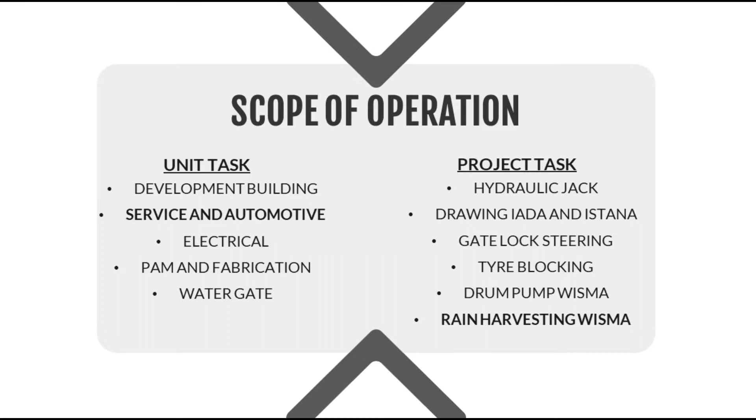As for the project task, we were given a project, each group, for us to complete. The project consists of hydraulic jack system, drawing, gate lock steering, tire blocking, drum pump Wisma, and rain harvesting Wisma. My project is the rain harvesting Wisma.

We go to unit tasks. For unit tasks, we went to site visit. My group and I went to visit the new drain location at Mukim Dewan, Machang. The visit is due to the complaint from the villagers about the irrigation system in this village.

The new drain function is to make sure the water in the river in the village can flow to the river easily.

During this site visit, I can see the roles that the JPS play in the community, and I can see the working system in a company where I can properly prepare myself for my future endeavors.

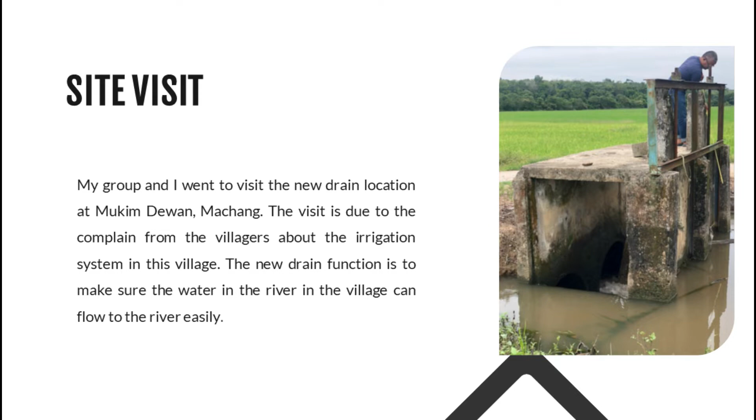We also have a workshop visit. In this picture is welding procedures. A welding practical slot has been booked several times by our supervisors for the intern students. The type of welding used is gas welding.

Gas welding is a type of liquid state welding process in which fuel gases burn to generate heat. This process can be done with or without help of filler material. We tried both methods, with and without using filler material, which is low fuming bronze, for practice.

During our project, I learned the most efficient way for us to perform the welding, because the supervisor in the workshop guided us on how to manage the gas welding components.

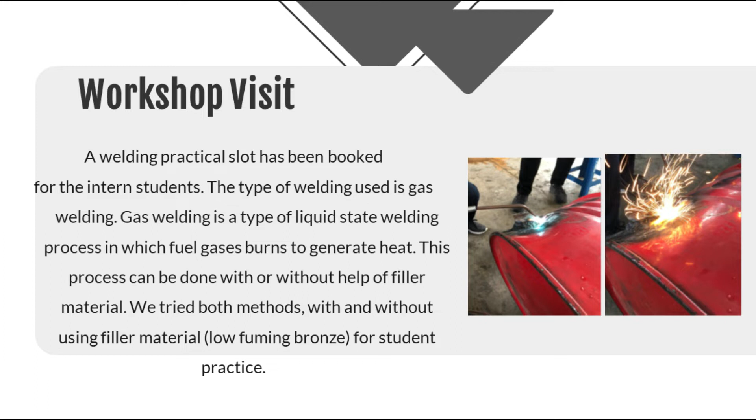Next, we go to project task, which is our group project. In our group project, we were tasked to conduct research on the rain harvesting system.

Rain harvesting system is a system in which rainwater is collected and kept in storage tanks rather than allowing it to run off. And in the JPS, there are 5 tanks that store the rainwater.

In this project, the rainwater is collected from the main building, where it is then redirected to 5 tanks to be stored and used later.

In this case, the water stored is used to circulate the water in the fish pond. The 3 tanks located at the back of the building and 2 tanks located near the parking lot next to it will be combined to be a source of water to the pond nearby.

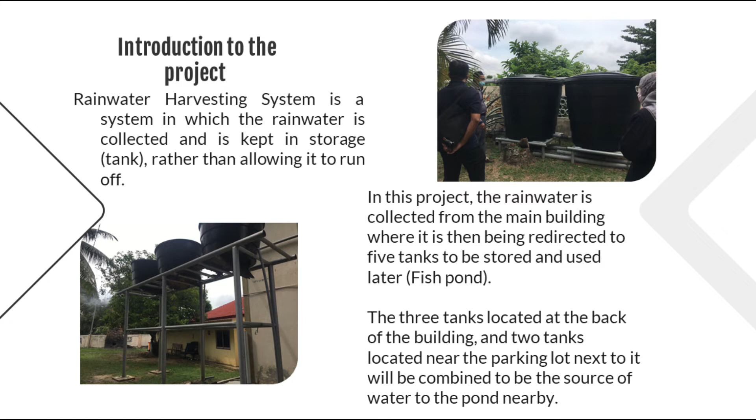The objective of our project is to harvest rainwater into the tank for filling the water into the fish pool. This way we can use a free energy system to supply water into the pool without having to rely on electric energy and external components such as a pump.

To cycle the water in the fish pool by using the rainwater harvesting method, to maximize the system by increasing the height of the 2 tanks at the front section. Next is also to save the budget from using tap water, since the water can be recycled from natural sources.

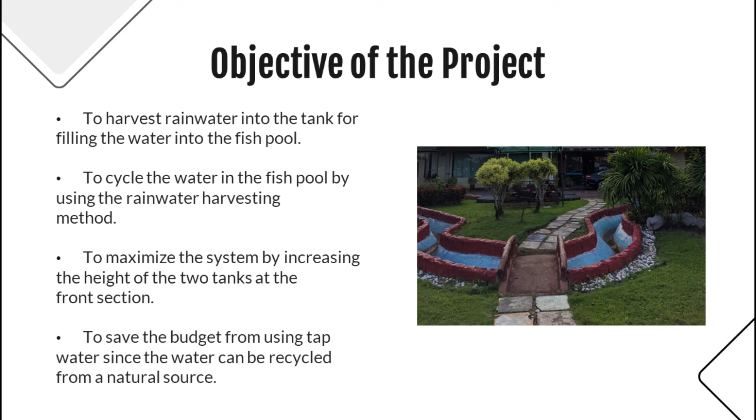We can see that the rainwater harvesting system is a really sustainable system in which we don't need to spend extra money and energy to supply water.

Next, we go to the flowchart of our project. During the starting of our internship, we were divided into groups. We were given the group projects, and next we received a detailed explanation by our supervisor, IR Tuan Haji Roslan Hussin.

Later our team members went to the Wisma JPS, which is located at Kota Bharu, to take measurements, to take the actual measurement of our project perimeter.

After that, we came out with a 2D design using SolidWorks software. And from the 2D design, we came out with a prototype, a mini model for our project.

After finishing our prototype, we came out with a DIY mini water pump. The water pump is to circulate the water in the fish pond.

After finishing the water pump, we went and tested our prototype. In the testing phase, there were several times when there was leakage from the model, and we had to repair it until there was no further leakage and it functioned well.

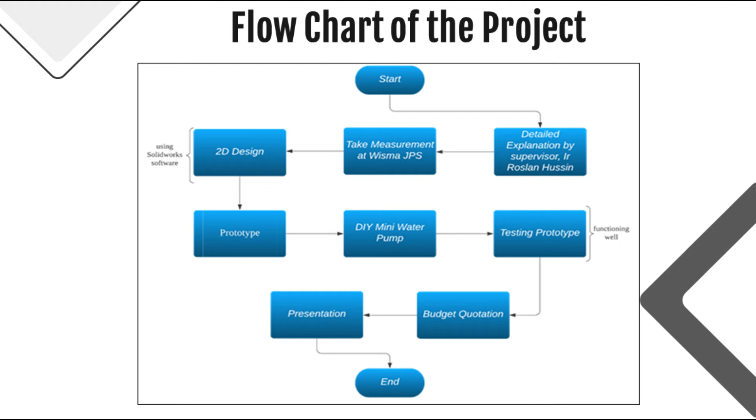Next, when we finished presenting our findings on the rain harvesting system, our supervisor gave us another task, which is to conduct a study on the booster system, also known as RAM pump.

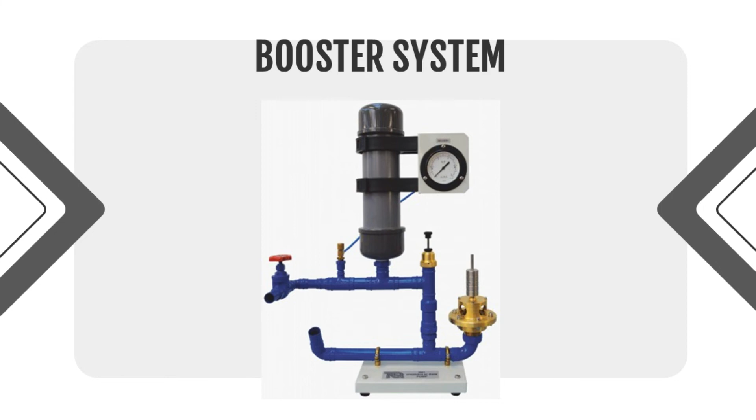Initially, the rain harvesting system in the Wisma JPS was already using the booster. However, the booster did not function well, and the water could not be supplied into the pool. Our supervisor asked us to find out why the booster system, a previous project done by previous internship students, didn't function well.

I'm going to explain briefly the booster system. Instead of using stages to increase the height of the tank to increase the force of gravity, the booster or ram pump is able to transfer water from tanks with lower heights to the fish pond.

Compared to our rain harvesting system just now, where we use the force of gravity by increasing the height of stages to make the water in the tank flow with high flow rate.

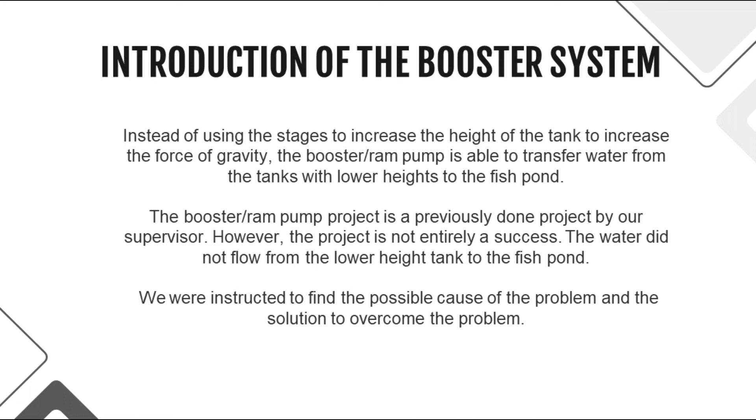The booster or ram pump project is a previously done project by our supervisor. However, the project was not entirely a success. The water did not flow from the lower height tank to the fish pond. We were instructed to find the possible cause of the problem and the solution to overcome it.

In the flowchart of our system, we started our research by receiving a detailed explanation from our supervisor, IR Tuan Haji Roslan Hussein. Later, we conducted a study on the booster system and listed out all the possible problems on why the ram pump or booster did not work properly. Then we proposed our solutions to the problems we listed.

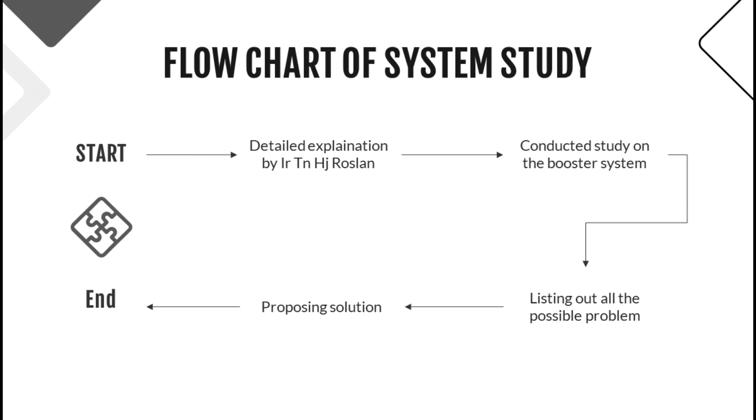That is the end of our booster project, which was basically only to study and assume why the booster did not work properly.

After detailed study, we came out with 4 possible problems. Number 1, the height of the tank is not enough to put pressure on the system, because we can see that the height of the tank is only 1 foot from the ground.

The second one is that there is a leakage somewhere in the system that causes instability of the water pressure. We assume that the leakage is underground, and it is hard for us to actually see it unless we dig the underground part.

The third possible problem is the position of the inlet and outlet pipe on the system, which are located at the same level, resulting in insufficient pressure to the water flow, so the water can't flow properly into the fish pond. The last one is that the system is not complete, due to the absence of a waste valve.

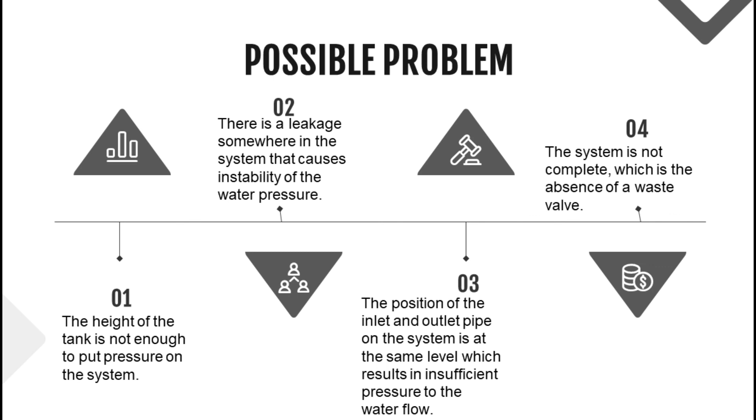So we go to our proposed solution. The first solution is to check the possible underground leaking of the booster by examining thoroughly. The second is to redesign or reconstruct the new booster with proper planning so that the system can work properly. The third is to increase the height of the current tank.

For your information, the current tank is only 1 foot from the ground, and we thought that maybe when we increase the staging, the pressure will be enough to make the water flow from the tank to the fish pond. So that is our group's proposed solution.

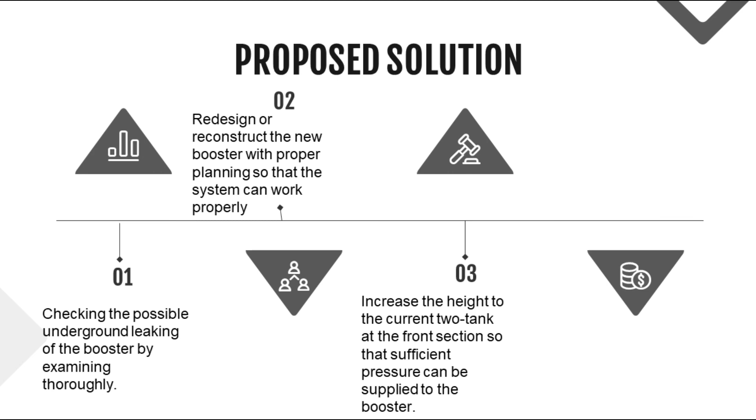Last but not least, we came out with our conclusion. Throughout this industrial training, there were so many things we could learn from the company, such as working culture, as well as learning how the drainage and irrigation industry works in a real environment. Next, we also had the opportunity to learn hands-on skills and knowledge from experienced engineers. Besides, we improved our communication and teamwork skills during this industrial training. We could apply all the skills which we learned in our syllabus.

I hope that what I have learned from my 10-week internship at JPS, I can use when I'm in the actual working industry in the near future. So that is all from me.